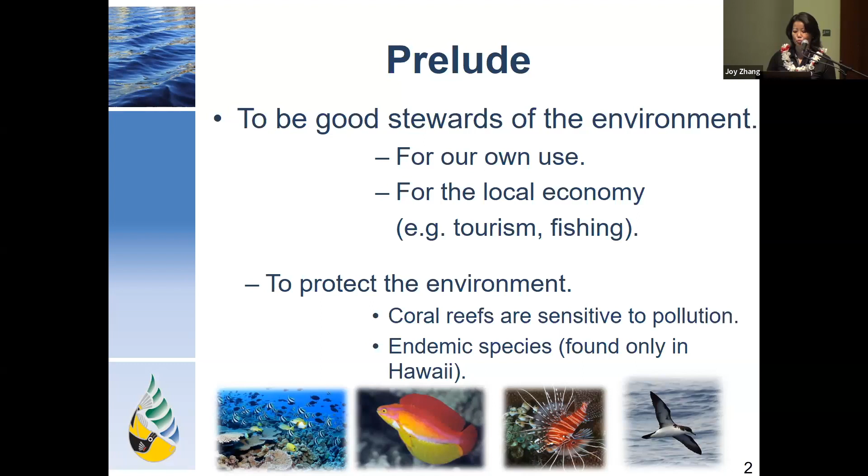Besides regulatory requirement, we all know that clean water is of vital importance to our own use, as well as to the fishing and tourism industries. Moreover, it is our responsibility to protect the wildlife, including many species found only here in Hawaii. And to continue to sustain in this world, we need to do our part to ensure that our coastal waters are clean for every living being to enjoy.

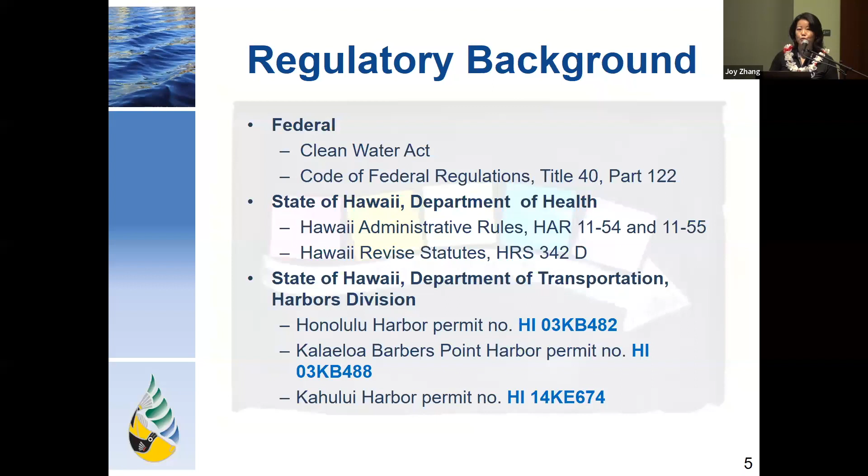These regs and permits are the primary drivers for Harbor's stormwater management program, also known as SWMP. The NPDES permit issued to Harbor's requires the development, implementation, and enforcement of our own SWMP, covering the 6 minimum control measures listed on these slides.

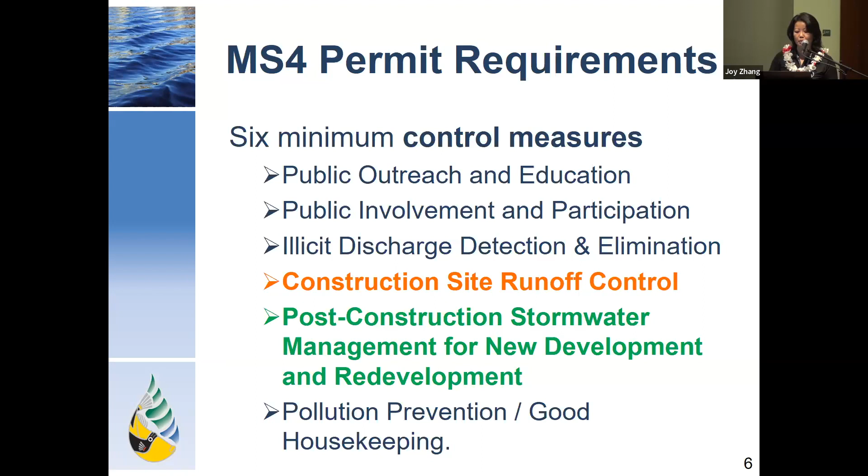For today's training session, we will be focusing on construction site runoff control and post-construction stormwater management for new development and redevelopment. Both program manuals are available online at this website shown here. Below is just a snippet from our website listing the manuals, the checklists, the forms, and the BMP plan templates tailored just for Harbor's construction and post-construction program.

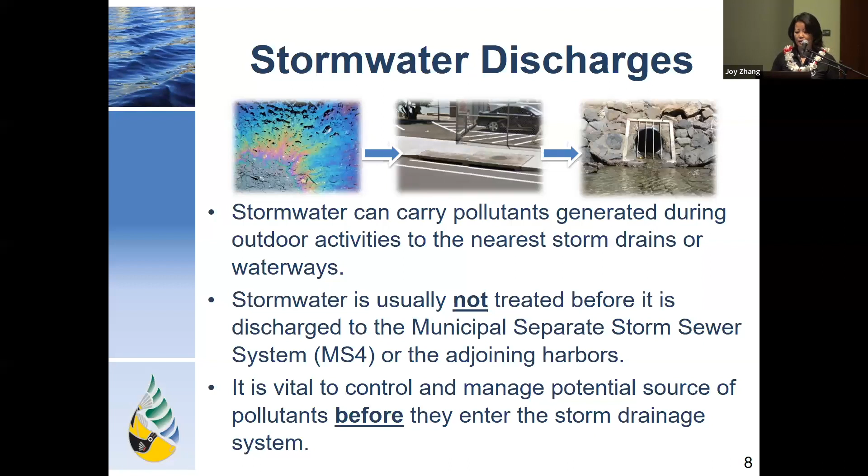So how exactly can a construction activity potentially impact the environment? Impact can occur when stormwater runoff carries pollutants from a construction site to nearby storm drains or waterways. Once the stormwater has entered the storm drain system, it flows and discharges directly to the adjoining state waters, for example, Honolulu Harbor. Therefore, it is essential to manage and mitigate the contact of rainwater with potential sources of pollutants before they enter the storm conveyance system.

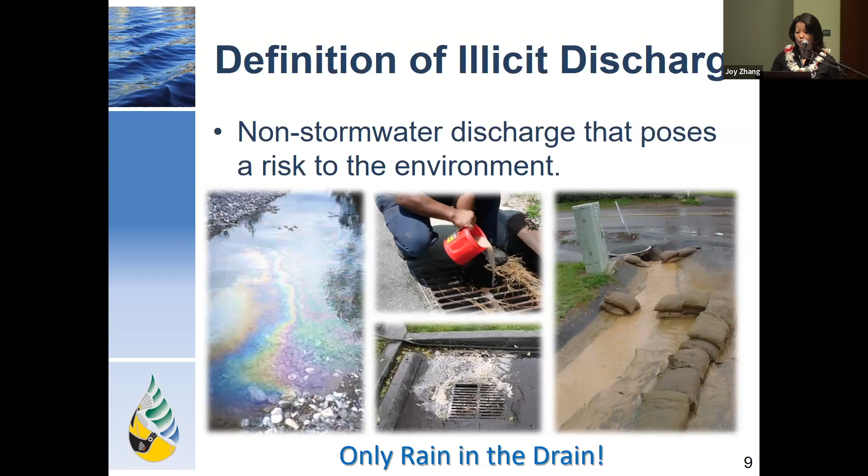One potential source of pollutants is what we classify as an illicit discharge, defined here as any non-stormwater discharge that poses a risk to the environment. An easy way to remember this is that only rain belongs in the drain. The picture on this slide provides some examples of illicit discharge that should be eliminated, such as oil spills creating a sheen on the water, and washed paint product, sediment, etc.

Some common pollutants from a construction site can include sediment from soil erosion and excavation, vehicle fluids from equipment parked on site, chemicals and aggregates stored on site, and also waste from a portable toilet, concrete washout, and littering.

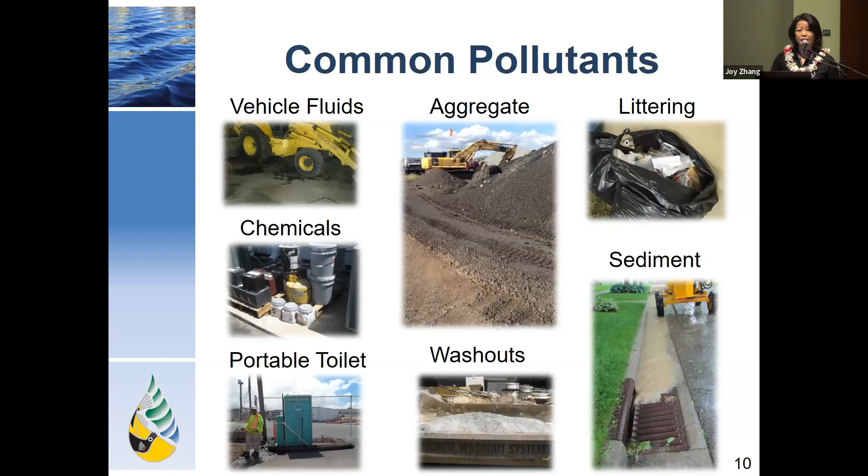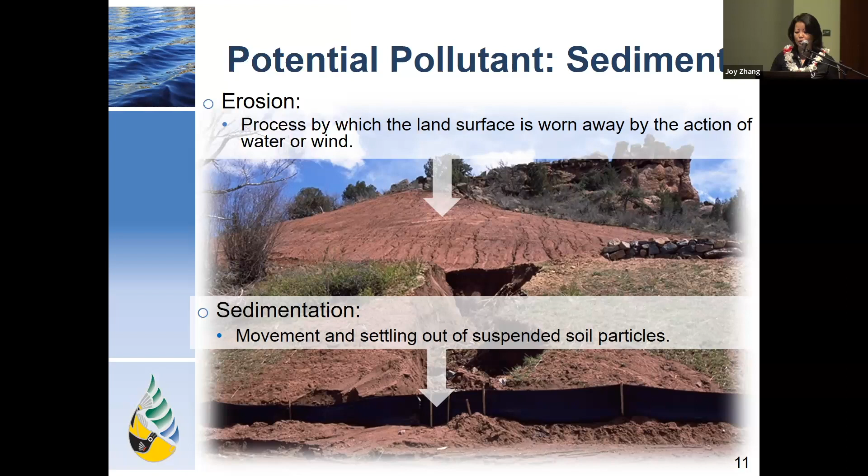Sediment is one of the most common pollutants found in our waterways, and it can be generated through surface soil erosion in situ or any in situ soil excavation. If not properly contained, sediment may fill up storm drains and catch basins, which are designed to minimize localized flooding by diverting stormwater away from roadways or ground surface.

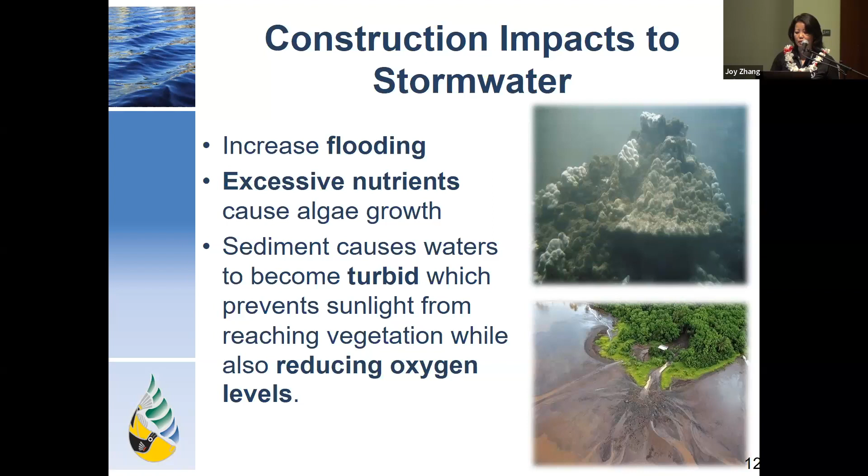It brings excessive nutrients from the sediment, which can increase the growth of algae. It can also cause the water to become turbid, preventing sun rays from reaching coral and reducing oxygen levels, which can impact marine life.

So if your project would disturb 1 acre or more, or is part of a larger common plan of development or sale, it is very likely that your project would be subject to an NPDES permit program requirement, which is administered by DOH Clean Water Branch.

HAR 11-55 Appendix C outlines the requirement for regulated construction sites. Please keep in mind that all NPDES regulated construction projects under Harbors' jurisdiction are not only subject to DOH inspection, but also subject to Harbors' construction site runoff control inspection program.

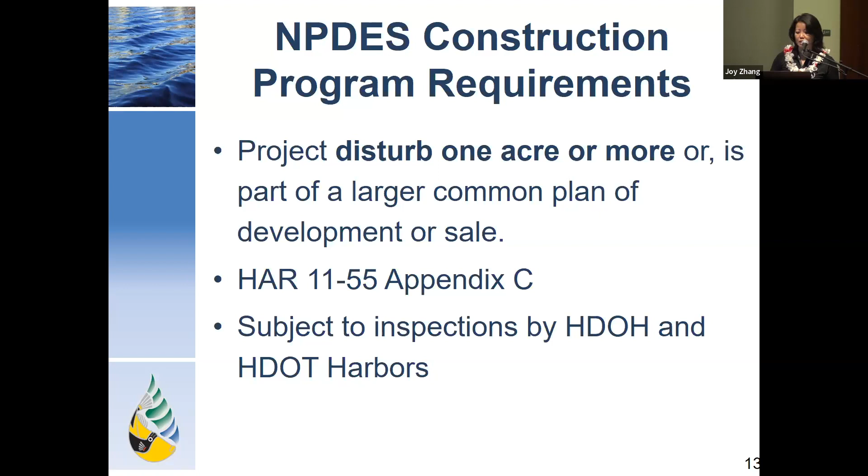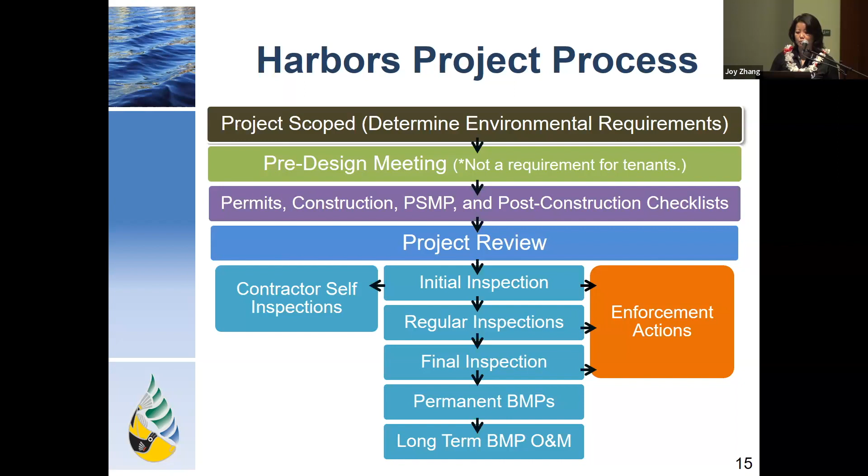During a project design phase, the scope of a project will be finalized by the design engineers, and the relevant environmental requirements will be assessed and identified. When necessary, a pre-design meeting will be held. All permits and applicable Harbors forms should be completed by the design engineer.

For a non-exempt project that is less than 1 acre, the design engineer would need to complete the notification forms for projects less than 1 acre and the related BMP plan. For projects subject to NPDES NOI-C permit requirement...

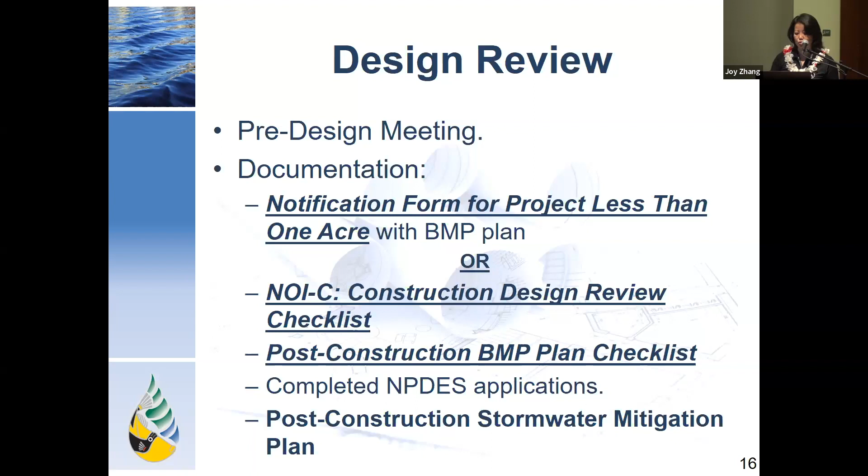In addition to the NPDES applications, the design engineers would need to complete a construction site design review checklist, a post-construction BMP plan checklist, and the post-construction stormwater mitigation plan if applicable. All these forms can be found on Harbors' stormwater management website.

Following the completion of the design phase, the project will then go out for bid through a public solicitation process. Following the selection, the construction contractor would then work on updating and finalizing the SWPPP or site-specific BMP plans, based on the requirements in the specification and upon their construction means and methods.

The updated SWPPP or site-specific BMP plan shall be submitted to Harbors' construction project manager or engineer for review. Upon acceptance and approval, the contractor can start the installation of the BMP measures prior to the start of any other, more intrusive works.

If a project is about 1 acre or more and requires an NPDES permit, the SWPPP needs to be prepared fulfilling the requirement of HAR 11-55 Appendix C as well. We do have a template for both the SWPPP and the site-specific BMP plan, which can be found on Harbors' stormwater website. Using this template can help you navigate through the plan preparation much easier, straightforward, and efficient.

BMPs are required to be implemented during the construction phase in order to minimize the impact to the environment. So what is a BMP? BMP, best management practice, can be a structural device, a system, or a procedure or practice.

Examples include a stabilized construction entrance and regular sweeping to remove accumulated sediment, installing a fabric filter or drain cover/seal at the storm drain inlet, and using biosocks to minimize the potential pollutants from discharging directly into the drain. Keep in mind that storm drain protection is usually considered the last line of defense, so additional BMPs should be implemented to assist in preventing an illicit discharge from occurring.

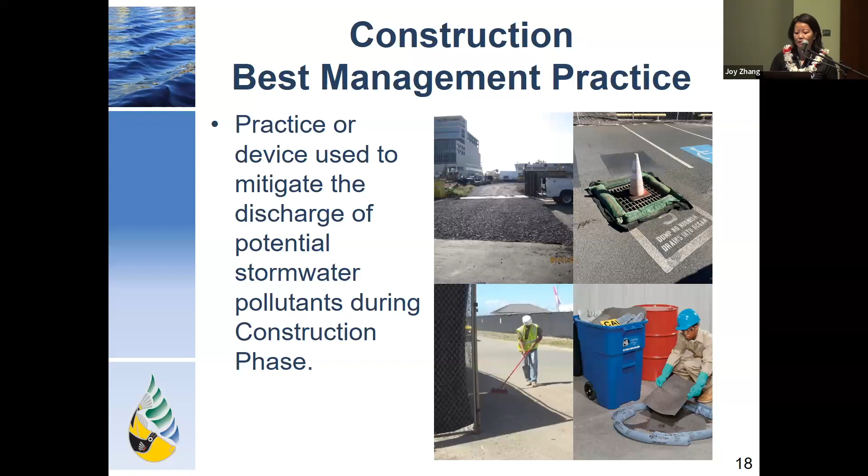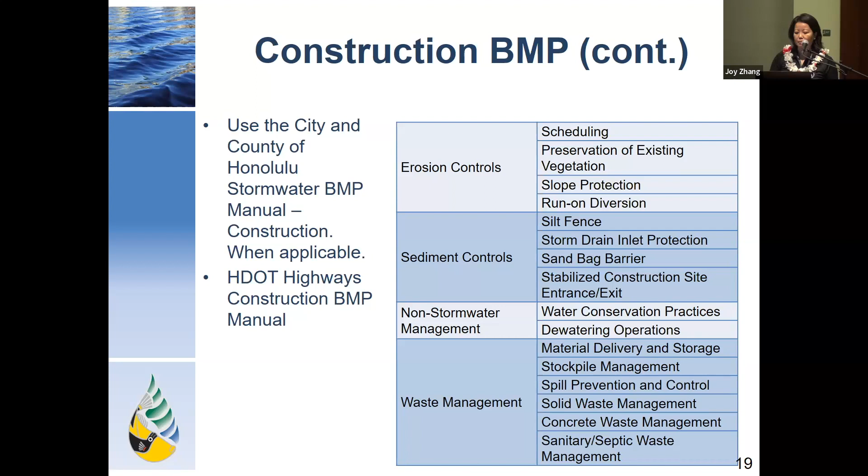Harbors has adopted the City and County of Honolulu's BMP manual for construction, which provides information about the design details that should be followed. Any applicable BMPs from the HDOT Highways construction BMP manual are acceptable as well. The BMPs listed here are just some of the examples.

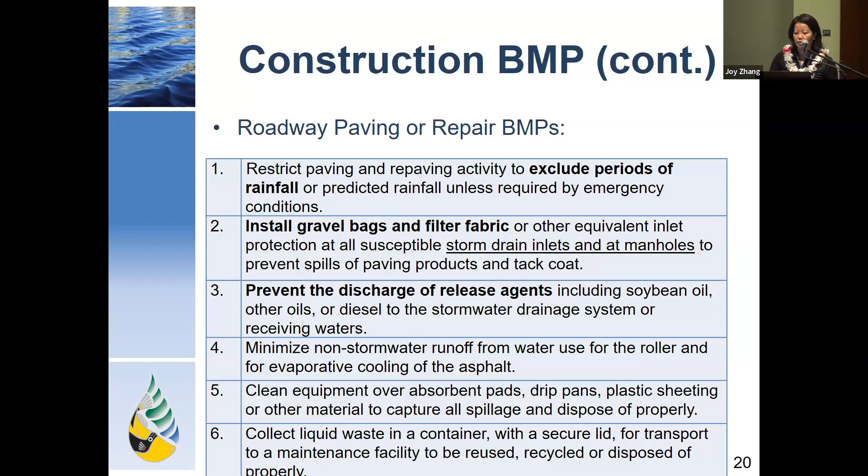Next, we will discuss Harbor's stormwater BMP inspections as well as Harbor's expectations during the active construction phase.

The Harbor Stormwater Management Program requires inspections of non-exempt construction sites. These inspections are conducted to identify any potential or active discharge of pollutants and to ensure deficiencies are corrected to stay in compliance and avoid being cited by the regulatory agency.

All Harbor's inspections include initial, recurring, and final inspections conducted by qualified inspectors. The initial inspection is conducted after all applicable BMPs have been installed, and any deficiencies or potential violations noted during this inspection must be corrected before the contractor can commence any further ground-intrusive activities.

Once construction work has started, Harbors will conduct recurring inspections for the duration of the project. This will occur once every 2 weeks during the wet season, which is October through March, and once every 2 months from April to September, which we consider the dry season.

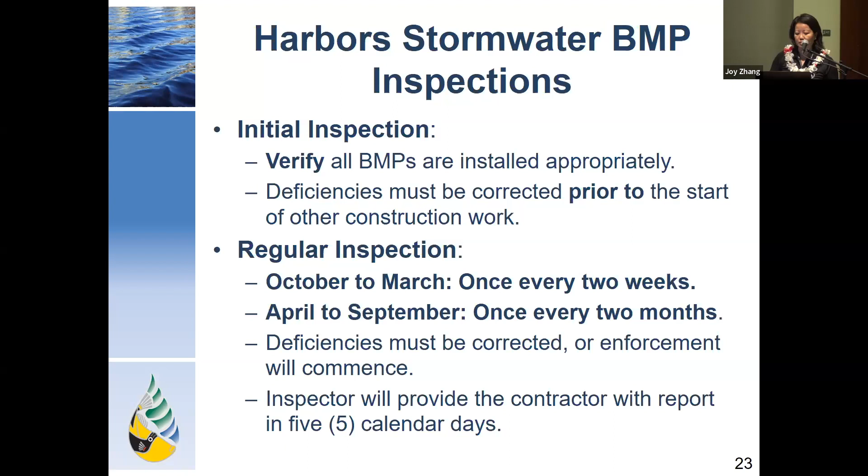All deficiencies and potential violations noted during these inspections may lead to enforcement actions if not corrected promptly. A copy of the inspection report will be furnished to the contractor within 5 calendar days.

The final inspection will occur once construction work is completed and the site is permanently stabilized. This inspection will also serve to ensure that permanent BMPs are properly installed per specification. Deficiencies and potential violations noted during any final inspections must be corrected prior to completion of the project, and final payment can be withheld until all corrective actions are completed.

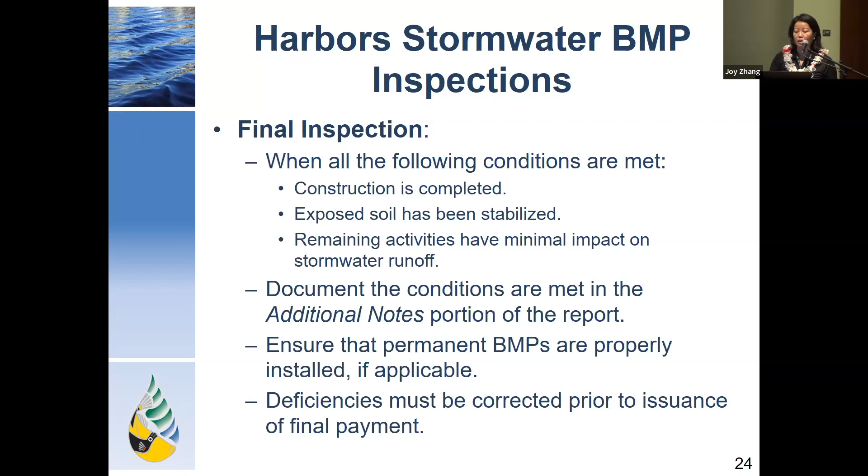Harbor does exempt certain types of projects from inspections. These projects usually bring minimal impact to the environment, such as minor land disturbance on a single lot, like a simple pole or post, sign, or fencing installation, any utility repair works, or paved surface repair, and also some other repair and maintenance activities.

In the following slide, we will discuss some common findings noted from Harbor's inspections in the past.

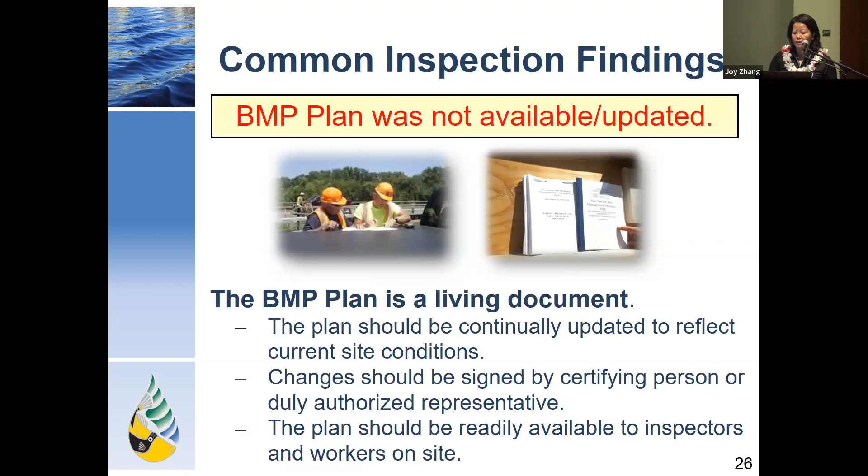BMPs are not available or updated timely. The BMP plan provides basic information about your site and identifies which BMPs are planned to be implemented on the job site. It should be promptly updated when necessary and must be kept on site or at an easily accessible location to make it readily available for on-site workers or inspectors. Make sure to obtain the project engineer's approval prior to updating your plan.

Stabilize the construction entrance. The tracking of sediment onto the adjacent public road is easily visible both to inspectors and the public, and can become a source of airborne dust, a nuisance, and can easily be carried into the nearby storm drain if not cleaned up promptly. Therefore, it is important that the construction entrance has a proper BMP installed and maintained regularly and when needed.

In general, the stabilized construction entrance should consist of a minimum of 50 by 30 feet and be covered with 3 to 6 inches of diameter aggregate over a geotextile fabric, and maintenance may need to be conducted regularly throughout the life of the project.

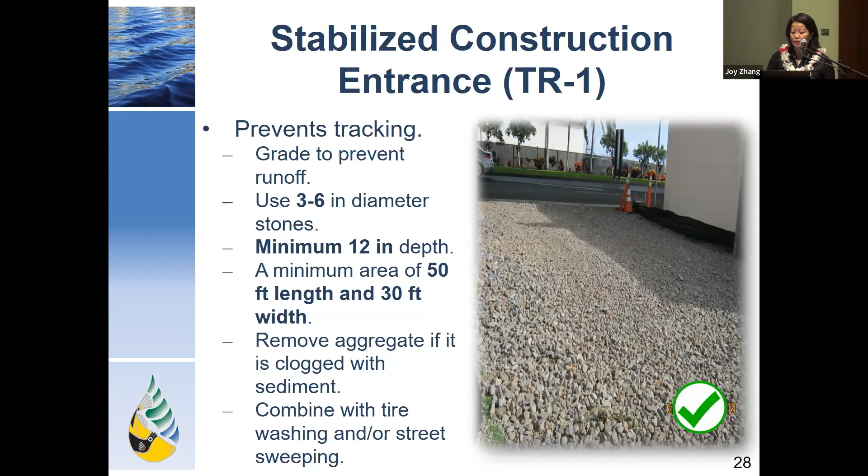Silt fences can be used to control sediment from a construction site. However, they must be properly installed and maintained. If not well maintained, sediment may be carried off-site and result in an illicit discharge.

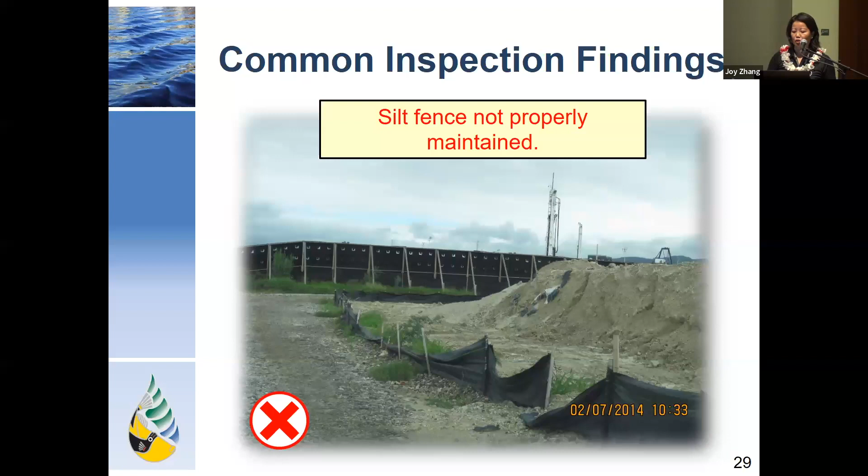Generally speaking, the silt fence should be properly installed and maintained by setting the posts on the downstream side of the fence every 6 to 8 feet. The fabric should be stretched tight, and the fence should be embedded in the ground approximately 6 inches to secure the bottom of the fence.

The goal of the silt fence is to hold sediment-laden water so that sedimentation stays behind the fence. Maintenance will be required to remove accumulated sediment on the silt fence when it reaches about 1/3 of the height of the barrier.

Some basic rules for using biosolid socks on your job site: make sure you're placing it on the ground and that it's in close contact with the ground surface. The ends of the socks must overlap a minimum of 6 inches, and the end of the berm should be turned up the slope to aid in containing sediment. Accumulated sediment must be removed when it reaches one-third of the height of the berm, and damaged sections should be replaced and repaired promptly.

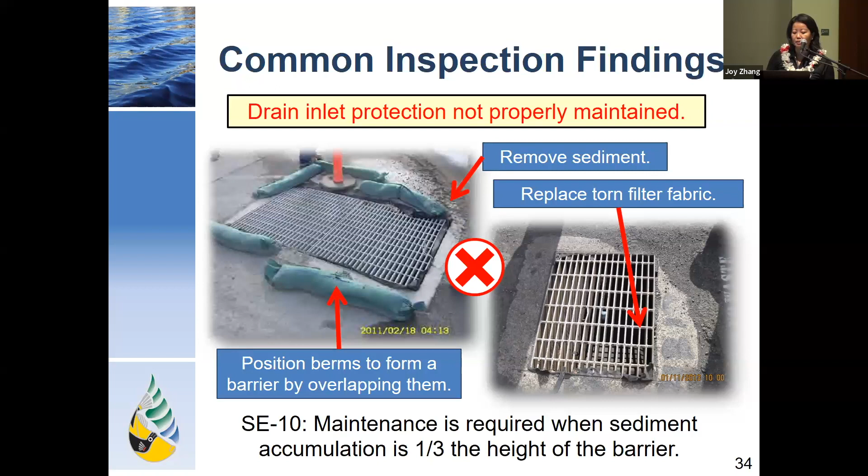Filter fabric can be used to contain potential runoff pollutants and prevent them from discharging into a storm drain system, and this is considered the last line of defense in terms of pollution prevention. A common finding during inspections is that the inlet fabric filter is displaced or in a deteriorated condition. Contractors should conduct frequent inspections to ensure any torn filter fabrics are replaced and accumulated debris is removed promptly.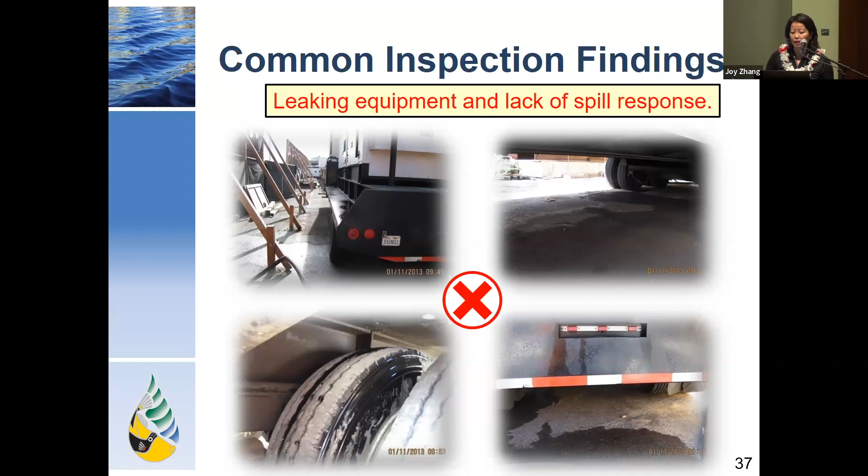Spills and vehicle leaks are a common source of pollutants on the construction site. Vehicles and equipment should be regularly checked, and if a leak is observed, ensure drip pans are promptly utilized. All construction workers should be trained on proper spill response. Spill kits must be kept on site and properly stocked, and spills should be immediately reported to Harbor's project manager or engineer, and to other regulatory agencies if the reporting threshold is exceeded.

Stockpiles of aggregate materials must be properly contained if they are to be stored for more than a day, and the stockpile should be positioned away from waterways or any storm drains.

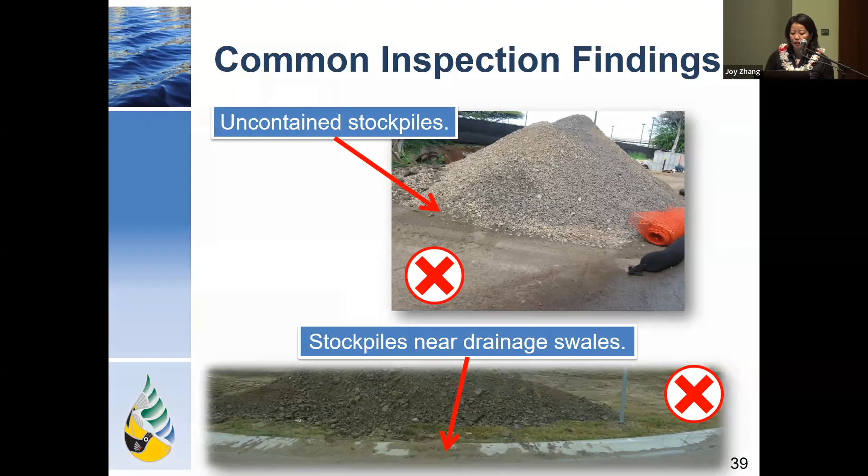Improper disposal of paint waste and painting equipment cleanup can also introduce pollutants to the stormwater. Proper containment, such as a tarp, should be set up to contain any paint drips and chips. Please mix and store paint within secondary containment and dispose of the paint waste properly.

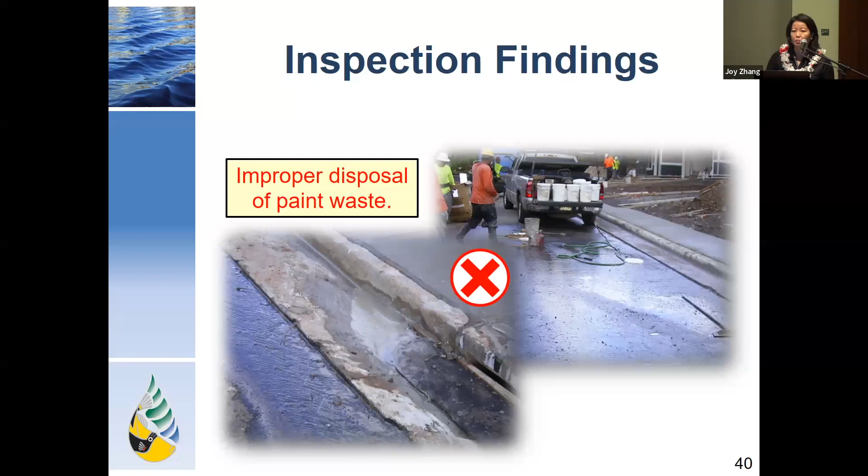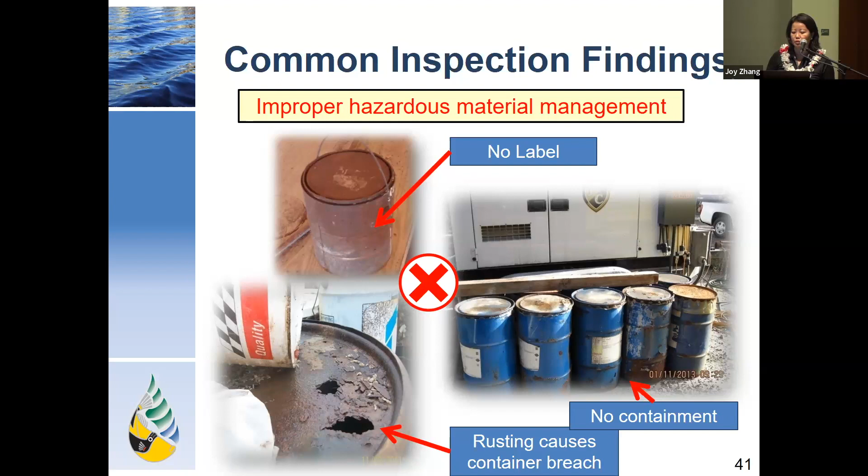Hazardous materials must be stored properly on site. In particular, for any liquid containers of 55 gallons or above, you should provide secondary containment. They should also be inspected regularly to ensure they're in good condition, and it's highly recommended that all hazardous materials be stored in covered areas to minimize their exposure to stormwater. Shown on these slides are some common findings related to housekeeping and waste management.

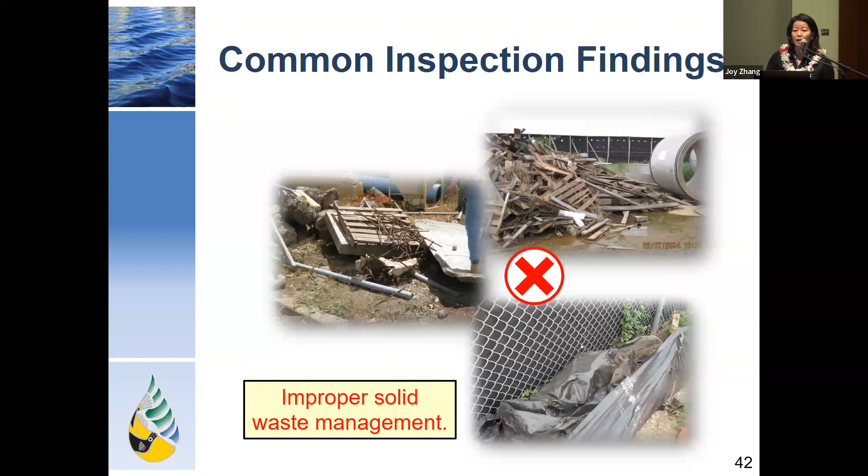Trash and debris throughout the site can be picked up by stormwater and carried to adjacent harbors. Make it a regular practice at your site to clean up debris at the end of each working day.

When it comes to solid waste management, some good practices include removing debris regularly and placing it in watertight dumpsters, making sure you empty the dumpster regularly, and segregating hazardous waste away from recycled items.

Throughout the construction phase, enforcement actions can be implemented where necessary to ensure corrective actions are completed. Enforcement will reference the Harbor SWPPP, construction contract documents, HRS, and HAR.

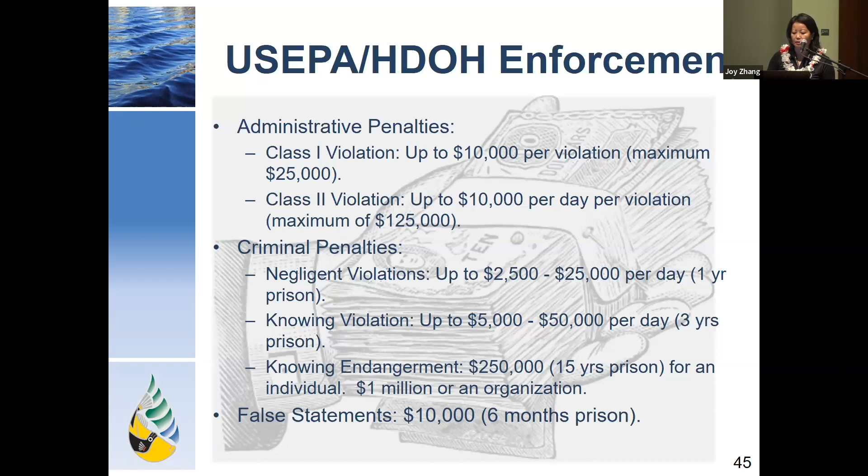All right, Harbor's post-construction program. It is considered a complementary component of its construction site runoff control program. Through the next few slides, we will discuss the requirement while providing guidance for project-specific planning, selection, and designing of post-construction BMPs to fulfill the NPDES permit and Harbor's SWMP requirement.

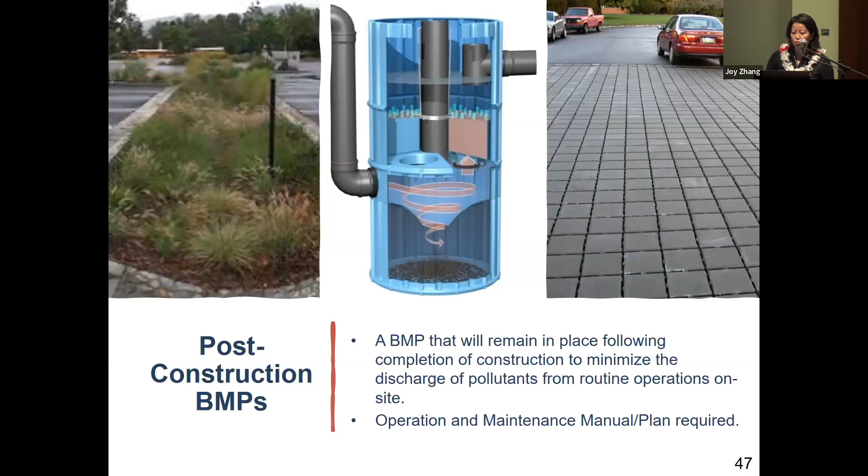Post-construction BMPs are of equal importance because they will continue to address the potential stormwater pollutants long after the construction project has been completed. Another important thing is that if you do include post-construction BMPs, it should be coupled with an operation and maintenance manual or plan to ensure that it continues to function effectively for the life of its intended use.

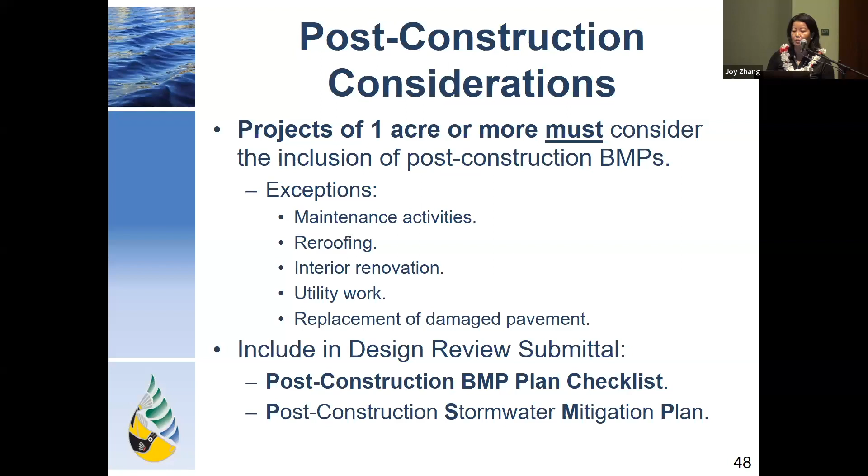Post-construction BMPs must be considered and evaluated for a project disturbing land of 1 acre or more. There are some exceptions, however, which include projects mainly involving maintenance activities, re-roofing projects, interior renovations, and replacement of damaged pavement. The design engineers would submit a permanent post-construction BMP plan checklist and a post-construction stormwater mitigation plan to Harbor's environmental section for review.

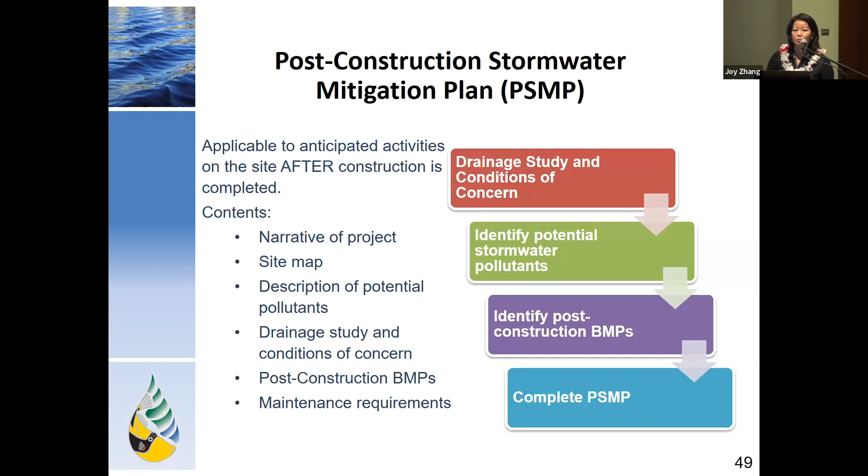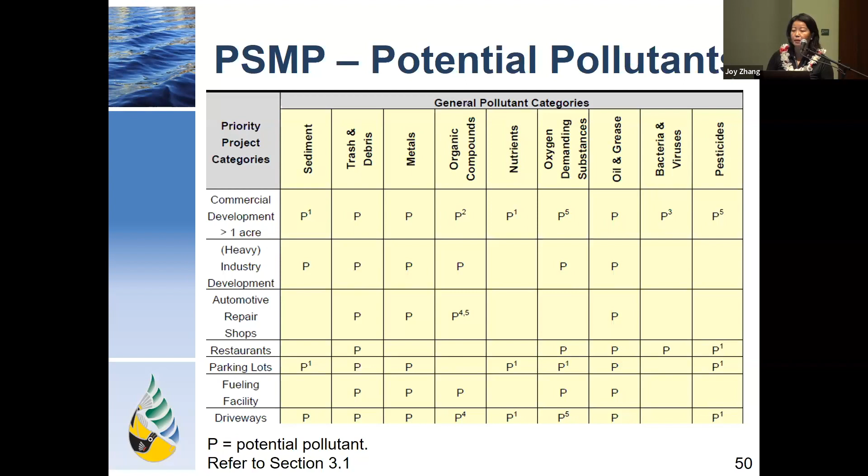This table provides some guidance on the type of potential pollutants that can be expected based on the land use. For example, if a project involves construction of a container yard, the post-construction BMPs to be installed would be able to remove sediment, oil and grease, and some dissolved metals if applicable to the site use.

The types of post-construction BMPs are divided into 3 main categories, namely low-impact development, which must be considered and evaluated first, followed by source control BMPs, and if either are not feasible, treatment control BMPs must be evaluated.

LID involves retaining stormwater runoff at the site, and treating it as a resource rather than a waste. Some examples include preserving vegetated areas or collecting runoff from roofed areas for watering.

The goal for source control is to prevent potential pollutants from contacting stormwater, such as covering a vehicle or equipment maintenance area. Treatment control attempts to remove potential pollutants from the runoff, and this includes BMPs like a hydrodynamic separator.

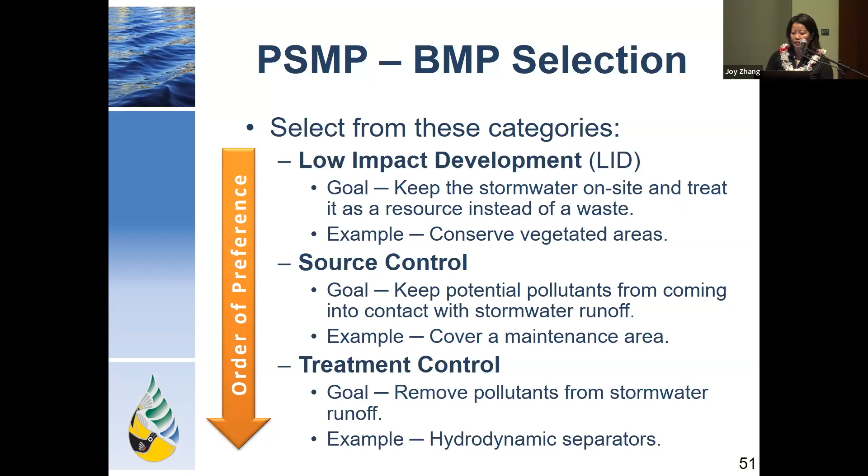Designers could refer to City and County of Honolulu's guidance when developing the PSMP, in particular the stormwater BMP guide and the rules relating to storm drainage standards. As a rule of thumb, volume-based BMPs must capture 1 or 1.5 inch of stormwater, and flow-based BMPs must capture and treat 0.5 inch of rainwater per hour.

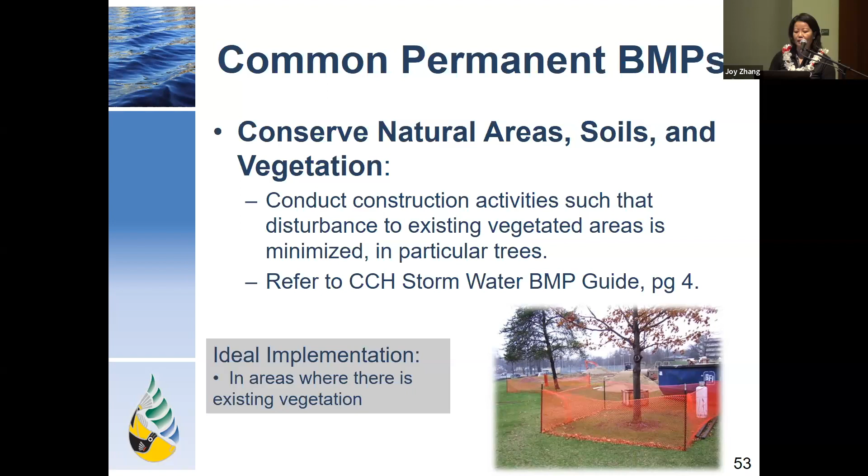In the next few slides, we'll be sharing some common permanent BMPs you can spot throughout the state. The first one is conserving the natural areas, soils, and vegetation. This BMP shown here is only practical in areas where there is existing vegetation, and it should be marked off during construction if practical.

Bioswales meet the objective of both retaining stormwater on site and also providing treatment. A bioswale consists of a channel where stormwater is directed and then infiltrated into the ground, thereby reducing the quantities of stormwater discharge. In addition, vegetation in these channels can be effective at removing pollutants that may be present in the discharge. Usually it's placed along the street and parking lot where stormwater needs to be drained from, and it can also support vegetation growth.

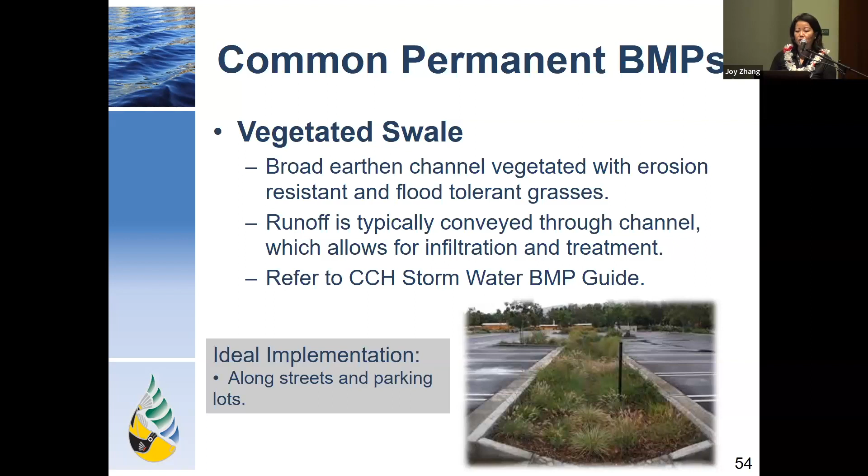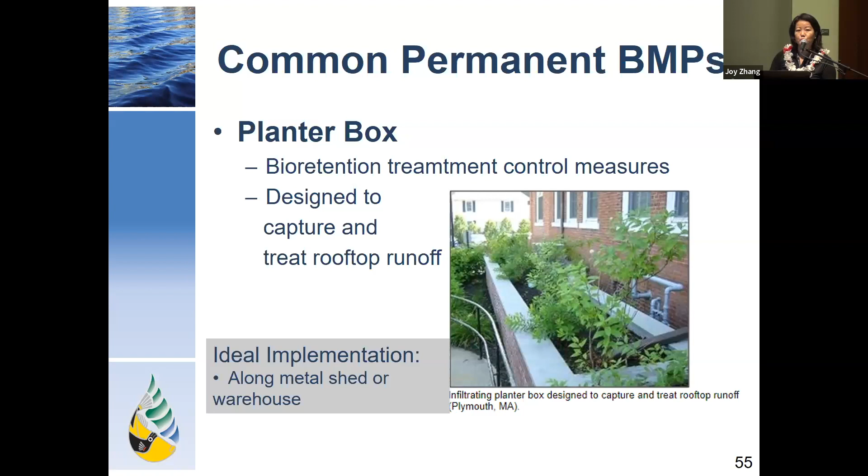Planter box. These are bio-retention treatment control measures that can be paired with an impermeable structure connected to an underdrain. The box can be comprised of a variety of materials such as brick or concrete, and filled with gravel at the bottom, and planting soil medium and vegetation. As stormwater passes down through the planting soil, the pollutants are filtered, absorbed, and biodegraded by the soil and the plant.

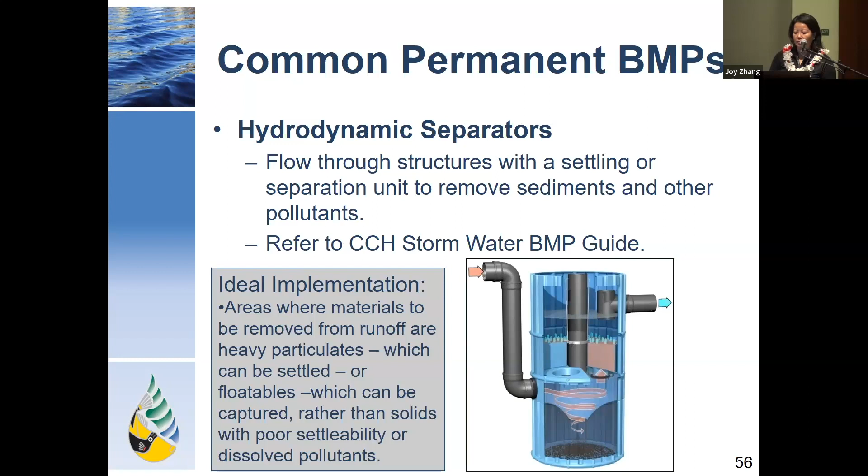Hydrodynamic separators are designed to treat stormwater runoff as it leaves a site. As the discharge flows through the system, it allows solids to settle out or float to the top, and the cleaner water to be discharged to the receiving water. This type of system works well in areas where solids are expected, such as public areas and container yards, and is suitable for locations with relatively high groundwater levels.

Filter devices are ideal for areas where littering can be common, and they can also be fitted with different media to remove targeted pollutants.

Harbor has instituted its stormwater management program to protect our coastal waters and to achieve compliance with environmental regulations. This is now a standard business practice for construction and should be followed by all parties involved. As part of the takeaway, please remember that all projects will be reviewed prior to start. Projects of 1 acre or more must consider or include a post-construction BMP if feasible.

Inspections can be a great tool for identifying problematic areas before resulting in enforcement. All parties should be familiar with construction documents, Harbor's SWMP programs, City and County of Honolulu's BMP manual, and their stormwater BMP guide. Installing and maintaining proper BMPs and keeping up good housekeeping practices are worthwhile and a small price to pay when it comes to stormwater compliance.

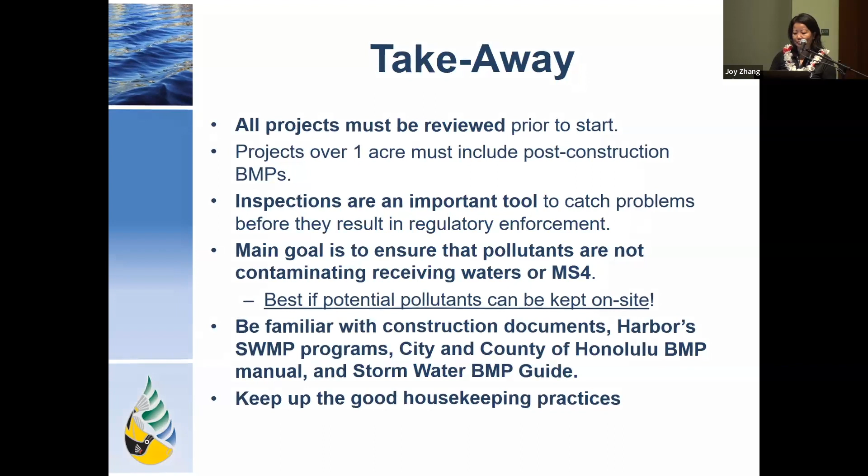I think this should conclude the session for today. Empowered with this knowledge, let's work together to safeguard our environment and protect our harbor waters. Thank you for being a steward of clean water.

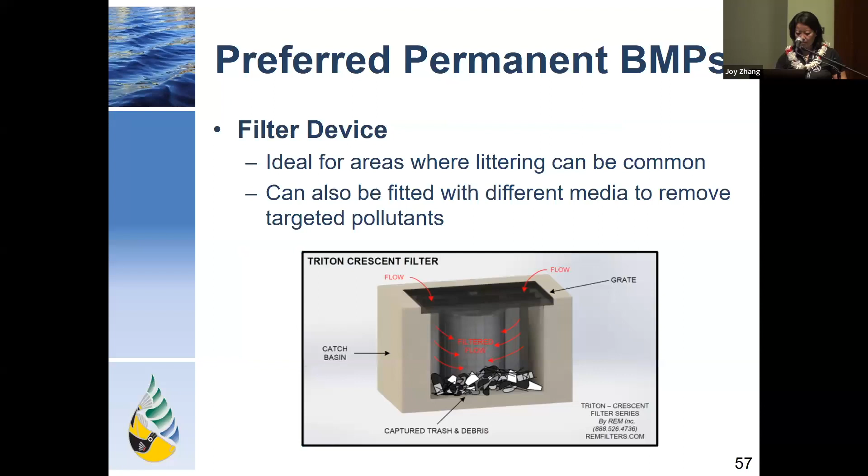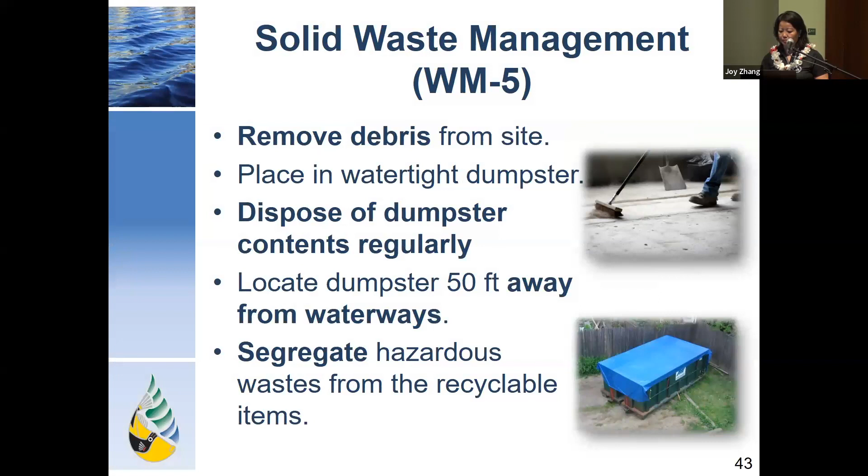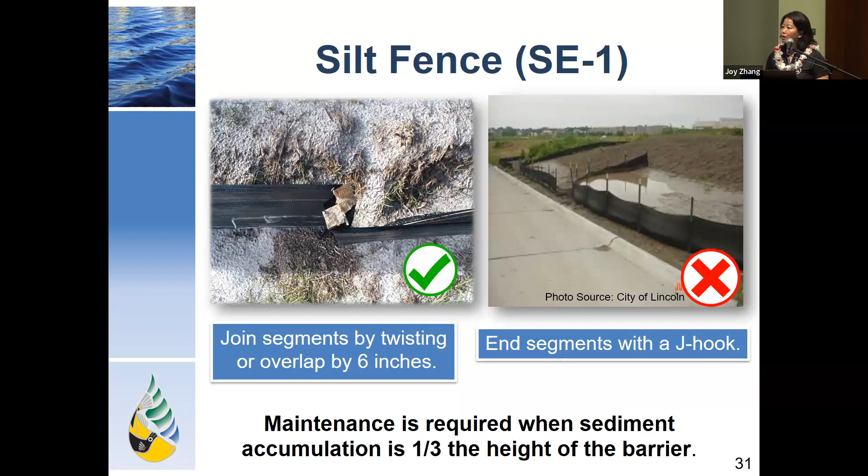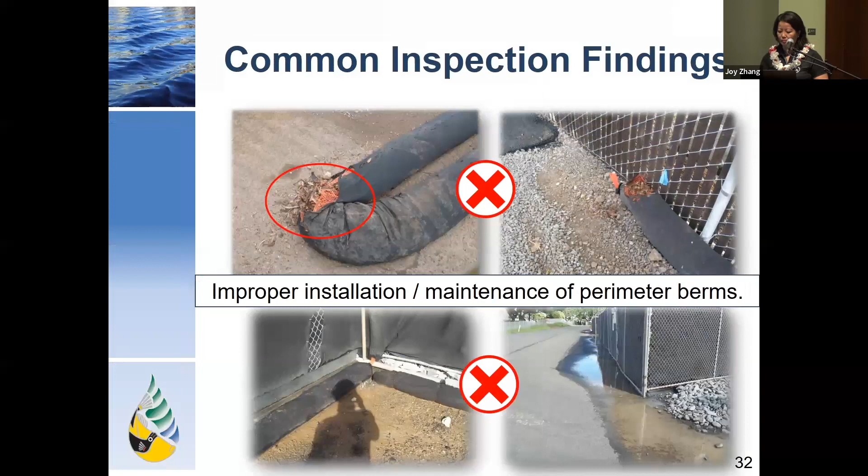You had a slide on kiddie pools, slide 36, and it was damaged. Are you just stating that to make sure they're properly maintained, but not saying a contractor couldn't use kiddie pools? Well, it depends on what kind of project you're doing. For smaller projects, we do still see contractors using kiddie pools, but this is definitely not an ideal containment for concrete washout. So the point of the slide is to make sure you have the appropriate concrete washout containment. Yes.